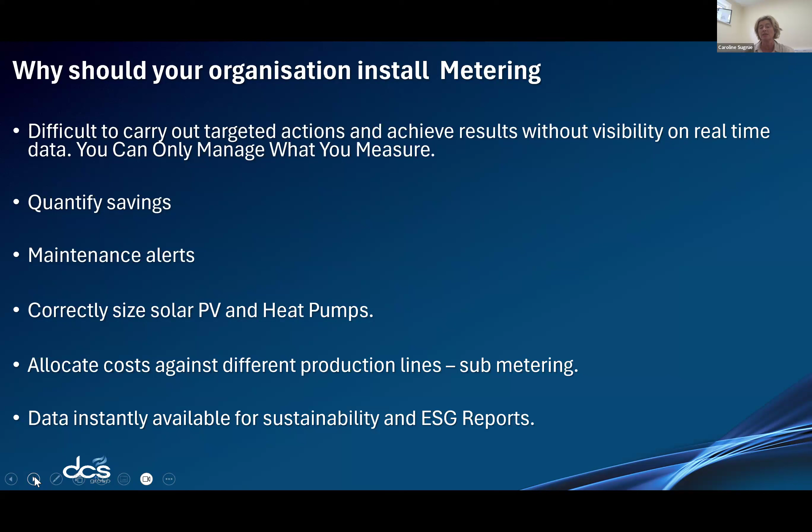So having a comprehensive metering system in place is just very helpful, and it gives you a lot of information. And through the software system, you can also collate your CO2 footprint that goes with all of that utility usage.

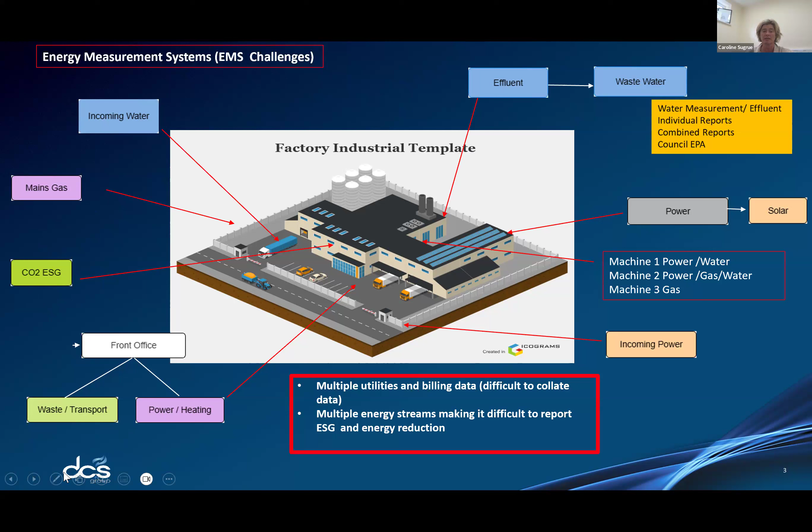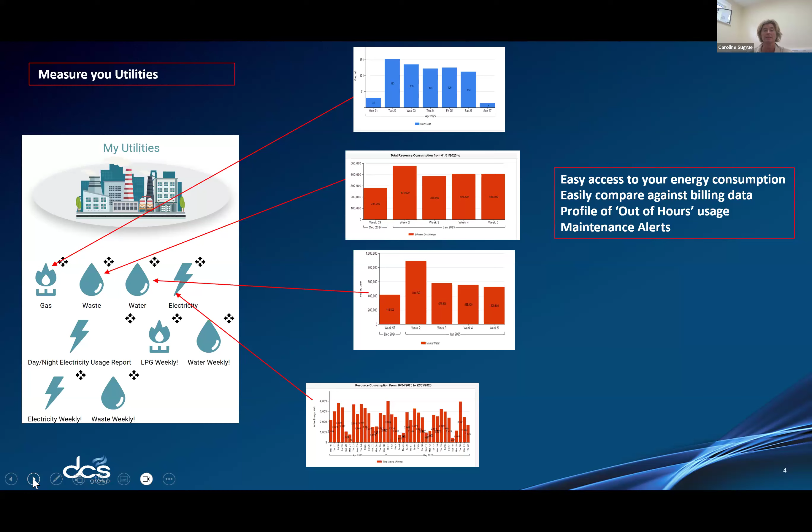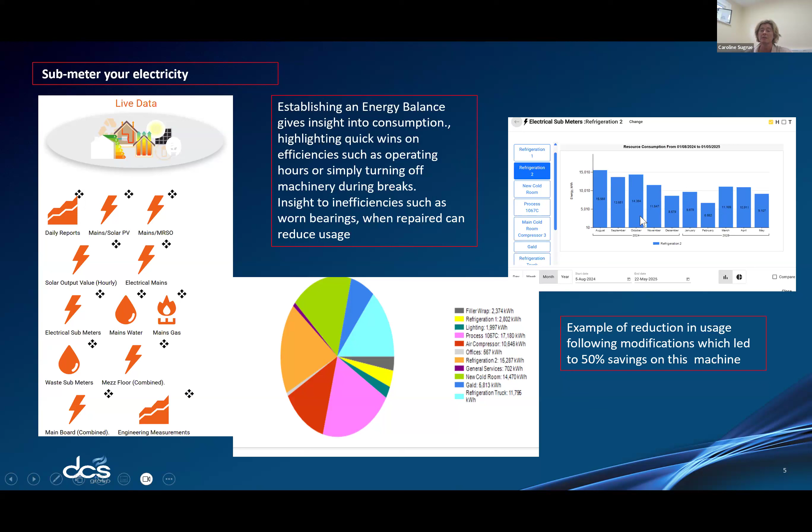This slide here demonstrates refrigeration from one of our clients, where when they put in the metering, they were able to make some changes to controls and temperature sets, and you can see the reduction that was made over a number of months when they just made changes. And this is purely from the information that they got from the metering. They didn't have to outlay any more capital. This was just behavioral changes, changing temperature sets, that kind of thing. So there's a lot of savings to be made there. It was 50% saving in that particular example.

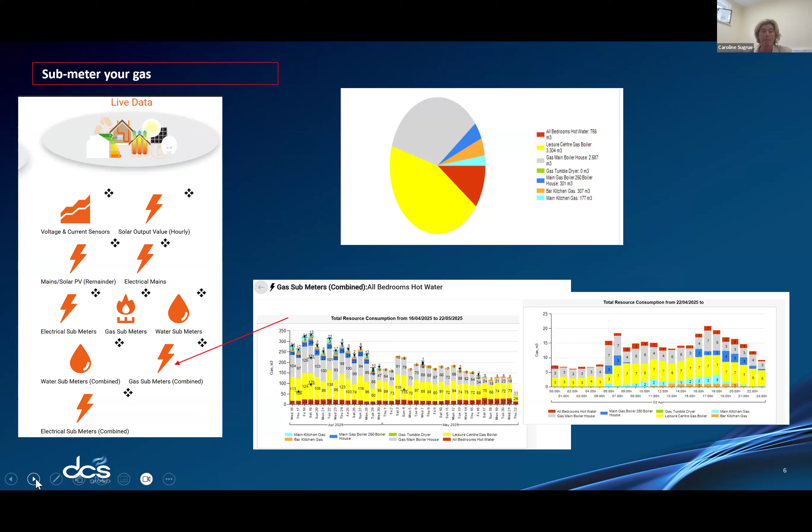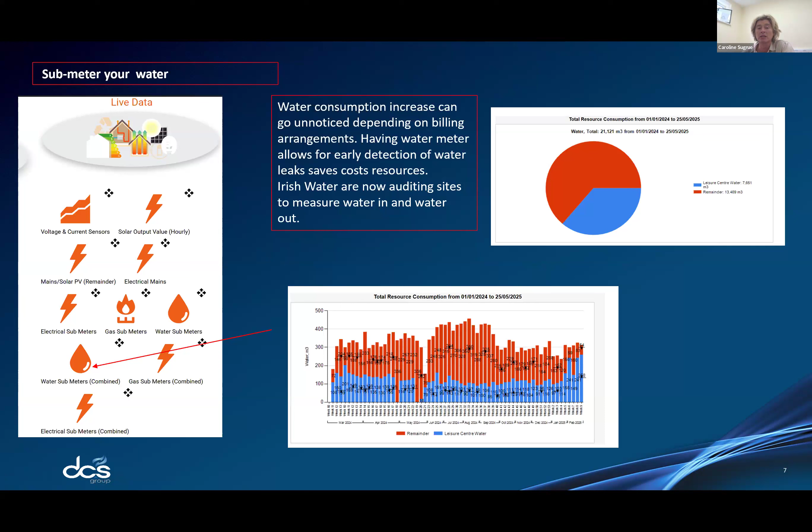And I see where county councils now are auditing clients that have effluent licenses. So when you are measuring your water in and your effluent out, you want those figures to be as close as possible, because if there's a big discrepancy, it indicates either a leak coming in or a leak going out, and you don't want that.

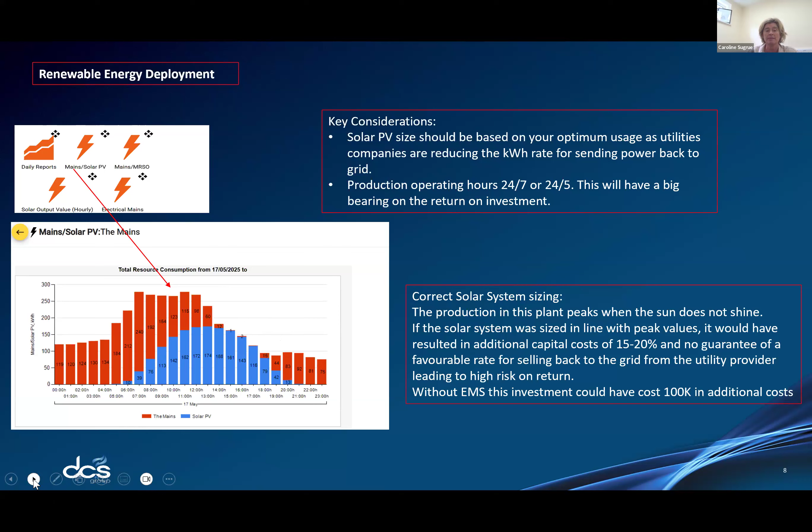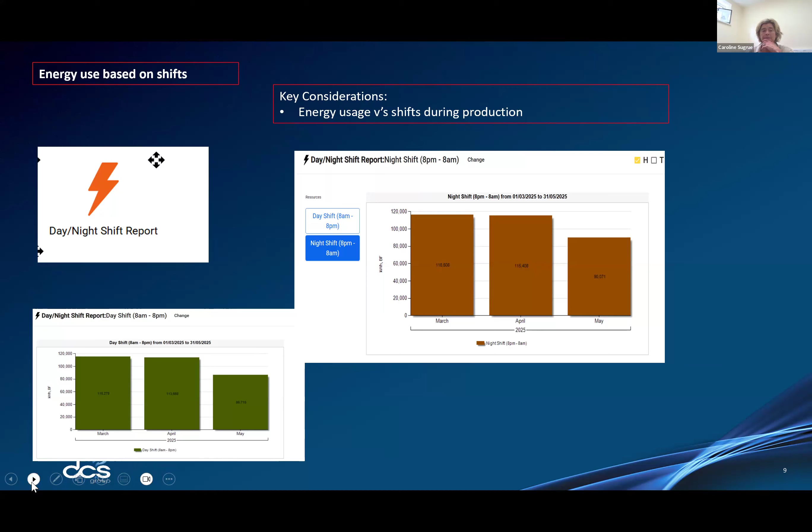And sometimes we see companies where they require this kind of level of information from a maintenance perspective, and sometimes it can be costly to get a meter in just to see this information from a third party. But if you have metering installed anyway, this is just an added benefit that you can get more information and data.

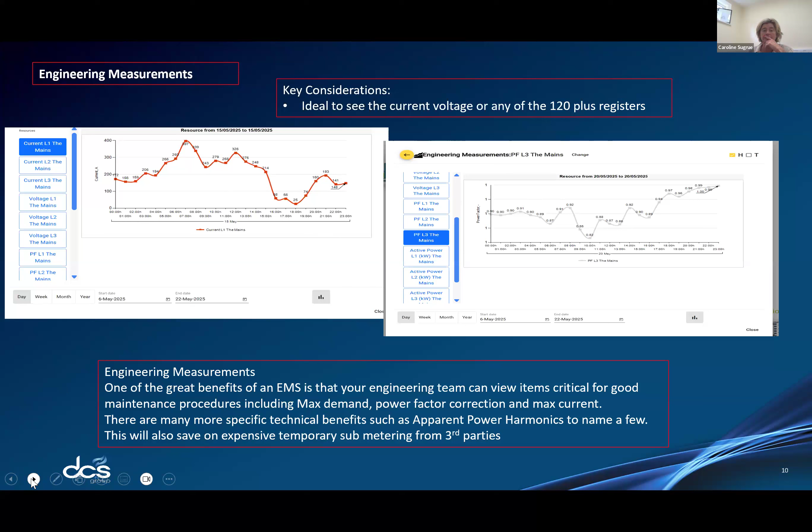So now I might just ask John if he'd like to join the conversation. We've worked with Lee Strand and John in a metering project. And John, if I might just start by asking you, why did Lee Strand consider installing metering? What data or benefits or information did they get from it, and did it lead to any changes in the organisation and in the plant?

Hi, Caroline. Thanks.

I suppose we looked at the energy monitoring project because we had people going around here. We knew we are a big user of energy. First of all, we do consume a lot of energy, and we were manually monitoring electricity meters, gas meters, water meters and stuff like that. We were doing that on a daily basis, but it just gave us an overall view of what we were using.

So we were very interested really in the whole sub-metering aspect of it, to find out where exactly in the plant or in the factory and inside the gates here we're using the energy. And the load profile of when it was being used during the day was very important to us as well.

Because, as you mentioned earlier on, we were looking at a solar PV project as well, and we wanted to ensure that we size that solar PV project correctly, because we don't have production here on a Sunday and a Monday. While we don't have actual production taking place, we'd still have a lot of refrigeration equipment and different things running, which would still be using a considerable amount of electricity. But we wanted to size our solar installation correctly, so that even on those days we don't have production, we still use the vast majority of what we produce here ourselves, rather than trying to send it back out to the grid.

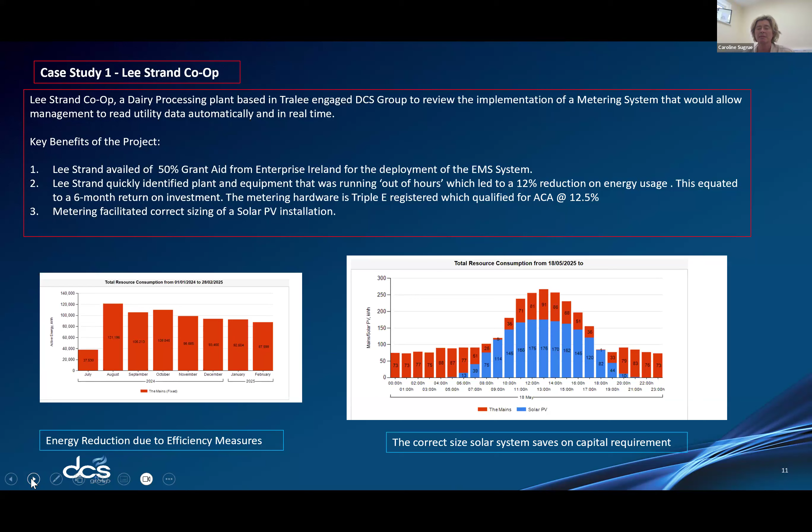Okay, John, thanks for that. Donal, I might ask you to join us now. Thank you. And maybe if I just ask the same general questions that I asked John: why did FreeFoam consider metering in the first place?

What kind of information did you get? Were you surprised at it? And what changes, if any, did that lead you to carry out?

Thanks, Caroline. You can hear me okay, yeah?

Yeah. Okay, so I suppose FreeFoam Building Products, they're a very, let's say, energy efficient driven type company. It's something that when I joined the company, 7 years ago, once I got my feet under the table, the mandate was to try and figure out how we can reduce our energy costs, but also then reduce our carbon footprint. So we are a company that's very much driven like that, and we needed to understand what we need to do. So we saw some initiatives that we could do, and we started working on this.

But as we were working on it, let's say we were changing out the lighting system, going to LED. As we were doing that, we realized, well, we don't really understand how much we're saving on this. There's no hard data on that. And it kind of emanated from that, because we don't have a static, let's say, electricity bill because of the amount of equipment we use here. We could be using 10 machines one day, the next day we could be using 4 machines. It depends on our demand.

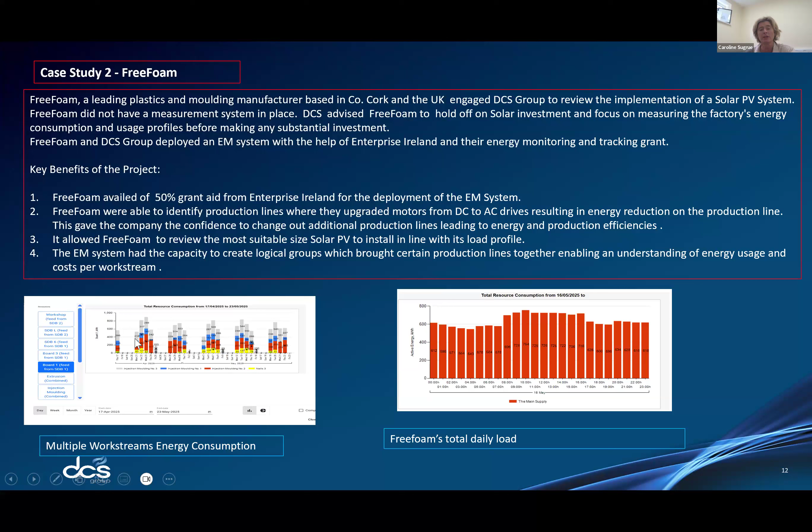Hello, we seem to have lost Caroline there. We'll just give Caroline a moment to see if she can come back. Is the presentation there? Yeah, so we're just online now at the moment, but if you want to continue on there, Donal, this is Caroline's colleague Donal, who's just joined us. Unfortunately, we've lost Caroline, but she'll probably be back. Yeah, Caroline was just finishing off there, I think, on the second case study with Freefoam. You don't have a copy of the presentation there? I don't have it there. Well, I think we were on the last slide anyway.

Yeah. So in summary, just to thank John and Donal there regarding the overall experience that they've had with us, and it's an ongoing experience, obviously. That's one of the things where Caroline's really coming through: we work in partnership with companies from the start to the finish, because energy management and energy products and new technology are being thrown at people left, right, and center at the moment. And we're 20 years at this type of thing. So having metering and measurement and taking it step by step, rather than jumping into a big solar project or a big heat project, having your ducks lined up, is really, really important for people.